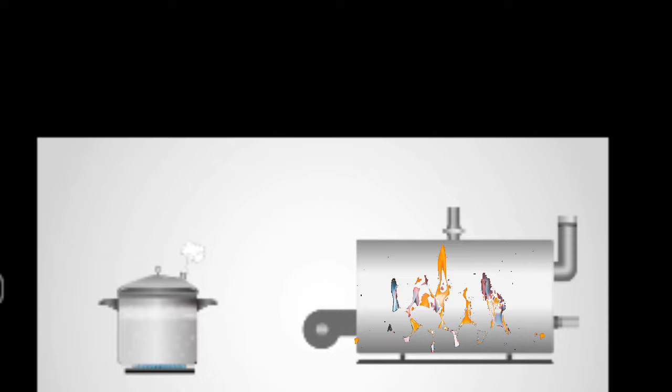So how does this compare with an industrial boiler? Well, for a start, industrial boilers can cope with pressures much higher than a pressure cooker. Industrial boilers are often made by welding together thick steel plates, allowing extremely high pressures to be made.

It has to be made incredibly strong to cope with the high pressure, as failure to do so will result in forces close to an exploding bomb.

The function of a boiler is to either produce hot water or steam. Hot water boilers heat water for the purpose of domestic or commercial heating and hot water supply. Steam boilers generate steam in order to power turbines for power generation and various other industrial heating applications.

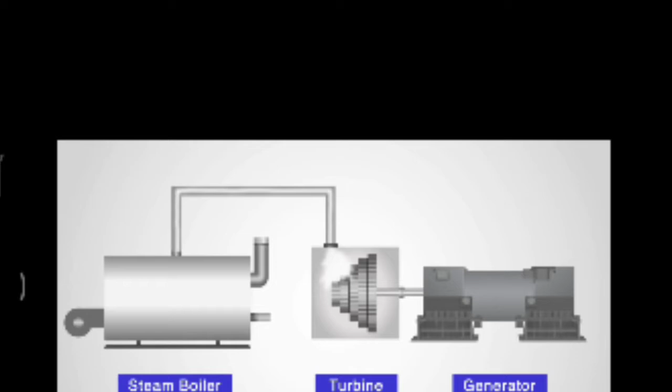To visualize the effects of steam generation using a boiler, think of the steam powering a turbine. When the steam passes through the blades of a turbine, the force turns the blades and accelerates the turbine. Steam contains an enormous amount of energy, so it makes the turbine quite efficient and, depending on the fuel used to boil the water, quite energy efficient too.

There are different types of boilers for all sorts of different applications. We are going to cover a couple of the different types, including how each of the methods is able to generate heat, so you can familiarize yourself and be able to correctly identify them.

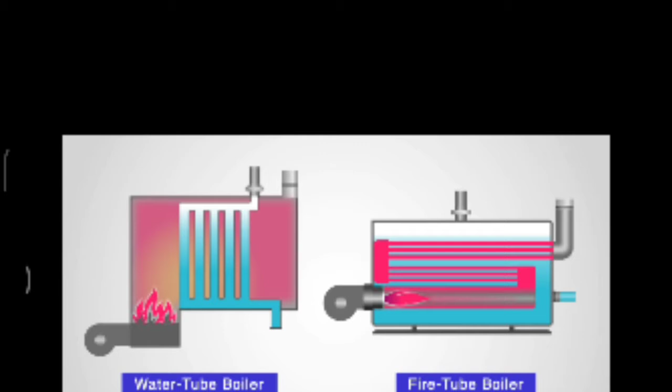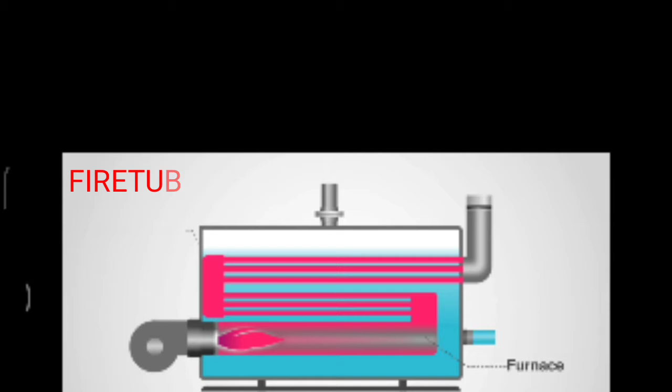Firstly, fire tube boilers. The typical makeup of this type of boiler is a furnace, a water tank acting as a boiler, and a smokestack. There are tubes running through the water tank carrying the heat from the furnace, and the smokestack vents the heat and gases caused by the heating effect so that the pressure does not continue to rise above the intended level.

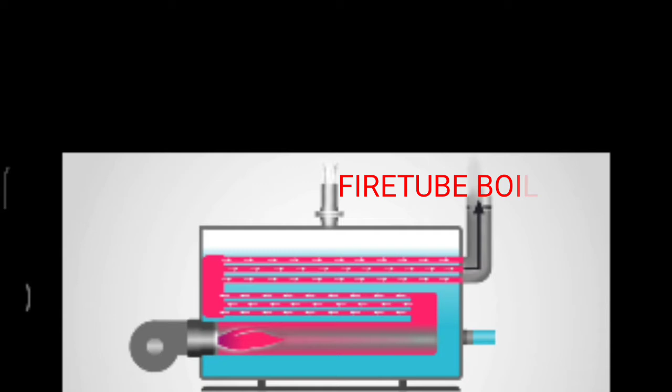So, the fuel is burned inside the furnace. The tubes transfer the heat of the furnace through the water in the tank. Once it is heated, the steam generated is moved along downstream.

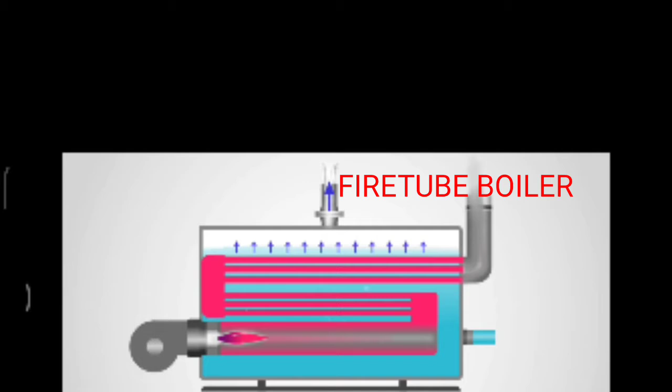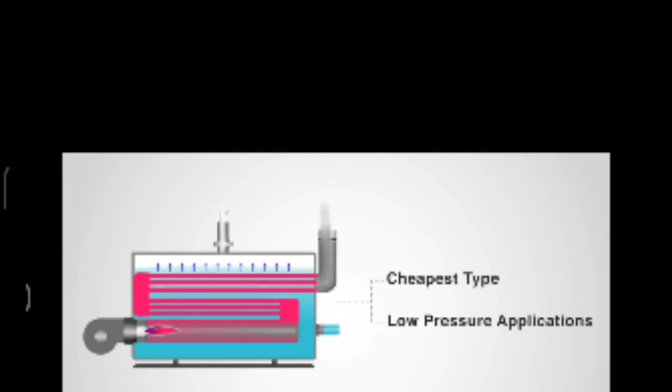Fire tube boilers tend to be the cheapest type of boiler to produce, as they have a fairly simple construction, but are typically limited for low to medium pressure applications due to the thickness of the outer shell containing the water.

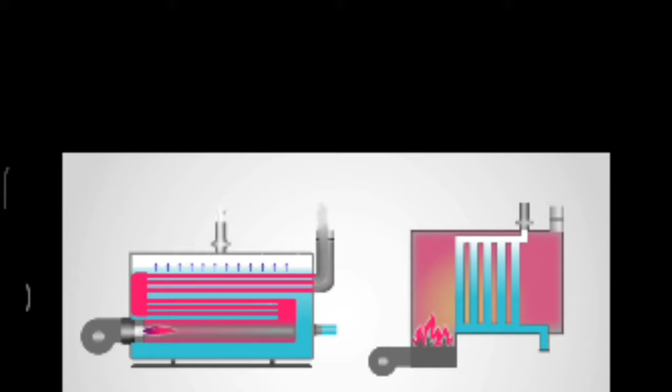Now that we've covered the fire tube boiler, let's have a look at a water tube boiler. The design is fairly similar to a fire tube boiler, but instead of the furnace heating fire tubes to heat water in a tank, the furnace heats water tubes inside the furnace.

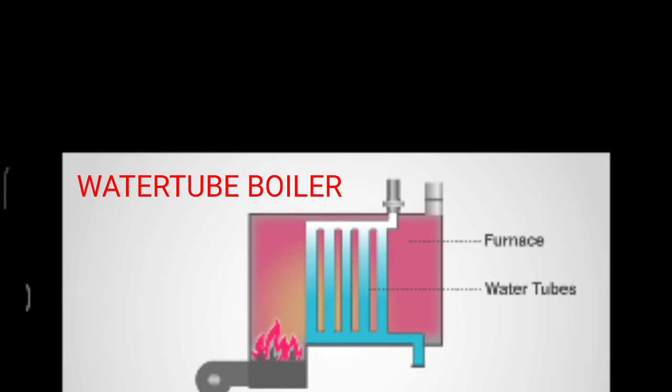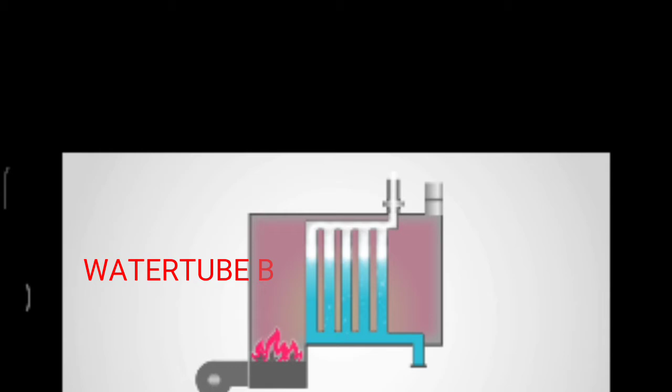In the same way, a fuel source is burned in the furnace, causing the water tubes inside to heat up. Once again, when the water is boiled, steam is generated and moved downstream.

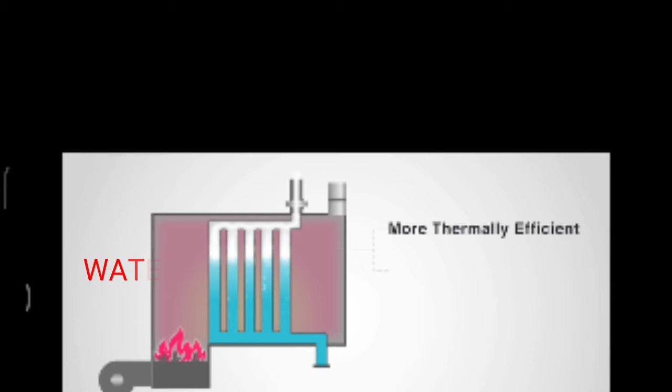A water tube boiler is more thermally efficient than a fire tube boiler, but they are more complex to construct, and the quality of the water can be a limiting factor. The water may need filtering to operate most effectively.

Combustion is the process of burning a fuel source. To create a reaction, there must be a fuel source, heat, and an oxidizing agent.

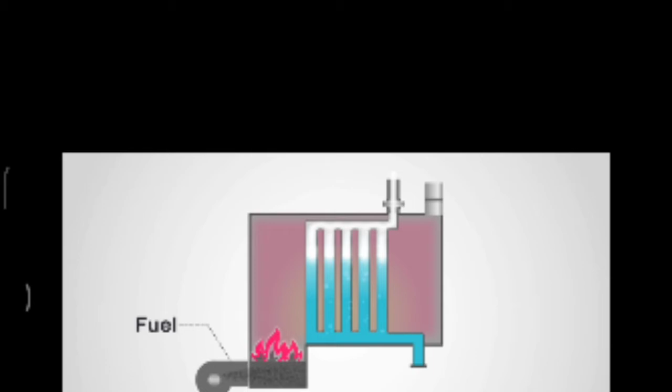Boilers can be designed to burn a specific fuel using any number of different technologies, but the main component to consider here is the heat source, or otherwise known as the fuel. The fuel is one of the most important aspects of a boiler, and is what burns inside the boiler to generate the heat. There are many different sources that can be used.

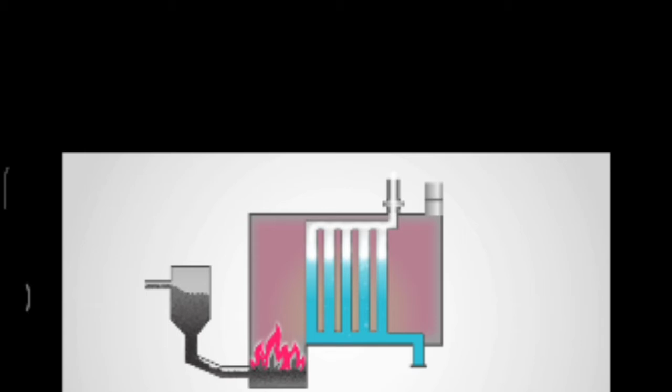Coal is a standard fuel source. In industrial boiler applications, the coal tends to be ground to a fine powder, as it burns more completely than traditional bricks.

Electric can be used as a heat source, either by resistance heating coils or electrode units. Electric would normally only be used for smaller commercial or domestic use.

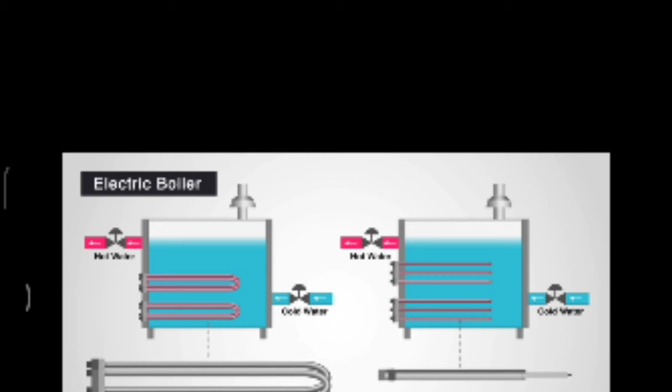Electrode-type applications require very high water quality and conductivity to work effectively. Maintenance is key to electrode-type applications too, as cleaning the insulators is required to prevent arcing between the electrodes.

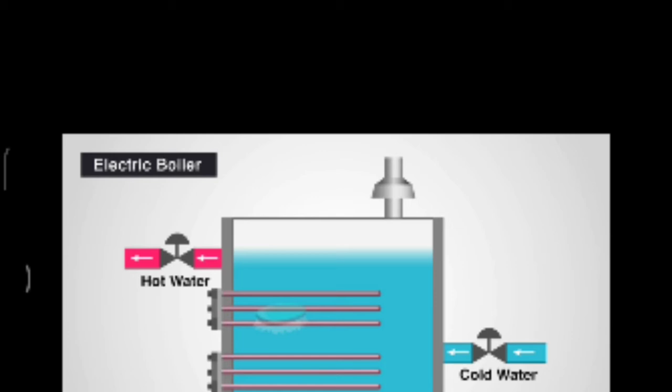Gas-fired boilers work by using either propane or natural gas, whereas oil-fired boilers work using gasoline or petroleum-based fluid.

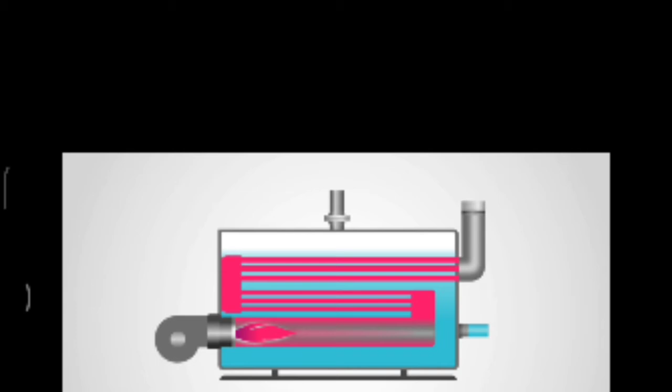So let's now recap a few of the things learned today. Boilers are an extremely versatile and important piece of engineering equipment, not only for us on a domestic level, but at a commercial and industrial level too. There are so many different applications that boilers are used for.

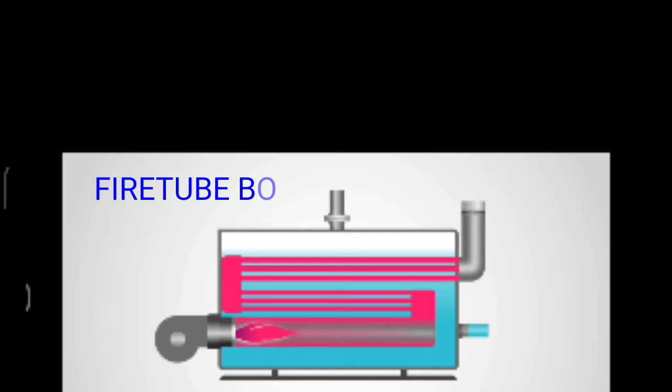They are used in the food industry. Food at various stages of production needs to be heated or boiled as it is processed.

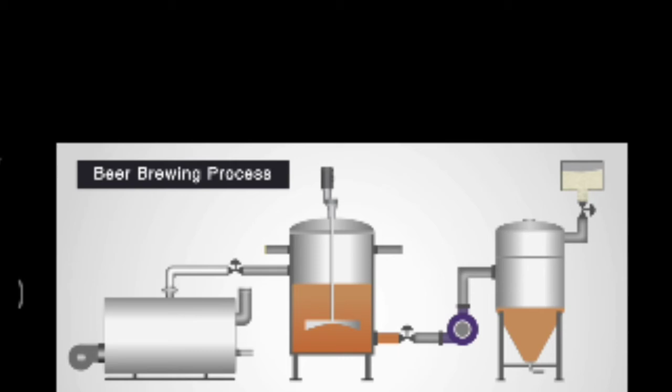Another interesting use of boilers is in the brewing of beer. During the beer brewing process, the malt needs to be ground and mixed with water, a process called mashing. This mash is then heated using steam for several hours before the yeast is introduced to trigger the fermentation.

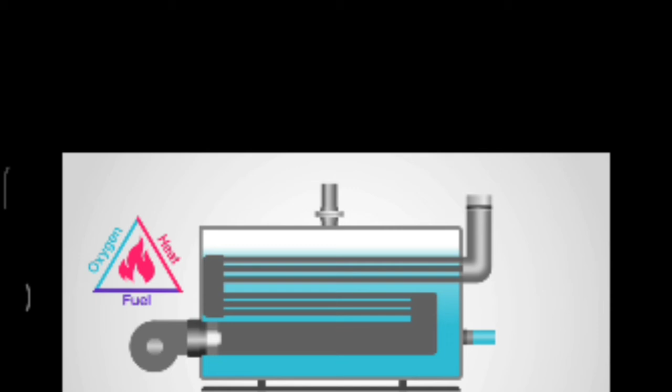To generate heat, we need a fuel source. The reaction of having a fuel source, heat, and an oxidizing agent allows for a reaction to take place. This keeps the heat source going.

By heating tubes of water and using fire tubes to heat a tank, steam is produced at extremely high pressures to produce enormous amounts of energy.